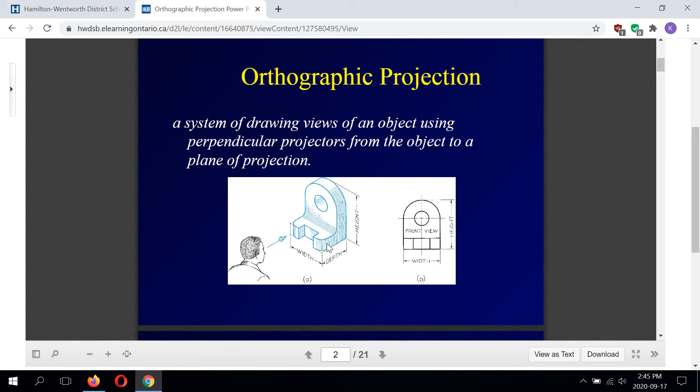certain topics here. So, orthographic projection multi-view drawing is a system of drawing views of an object using perpendicular projectors from the object to a plane of projection. Meaning that when you look at an object, in this case, it has a width, a depth, and a height. And if this person is looking at it straight on at the front in full 2D perspective, this is what you're going to see. He's only going to see this surface through the hole and 1, 2, 3 surfaces here that swing around as a radius on each side.

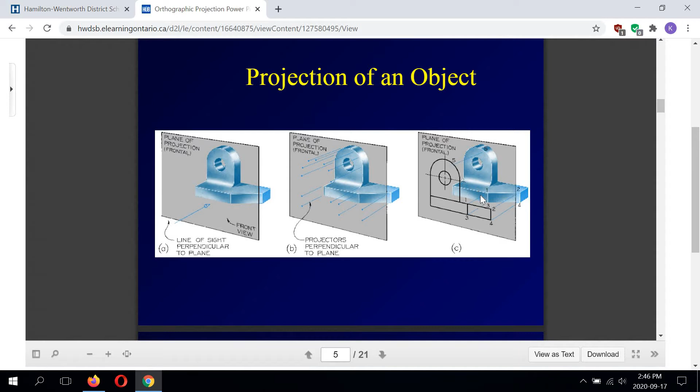We're going to skip over history and we're going to take a look at projection of an object. So all of these projectors basically protrude out to give you a two-dimensional view on any object that you're looking at, right? Whatever's in your line of sight, right? So this is how it starts. You look at the object in this direction, and then the plane of projection basically jumps out at you, and this is what you see in your sight, right? You're just going to see those normal surfaces that your eye is observing at that time.

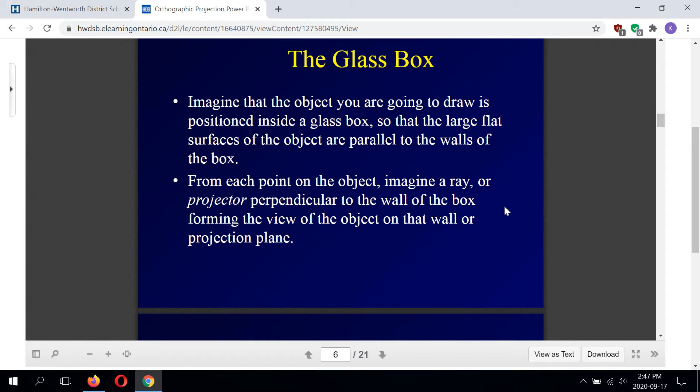So the glass box, which just by description is a little hard to understand. So it says that imagine that the object you are going to draw is positioned inside a glass box, so that the large flat surfaces of the object are parallel to the walls of the box. From each point on the object, imagine a ray or projector perpendicular to the wall of the box, forming the view of the object on that wall or projection plane. Well, to me, that description is hard to understand. But when you look at it, a picture is worth 1,000 words, much more than this.

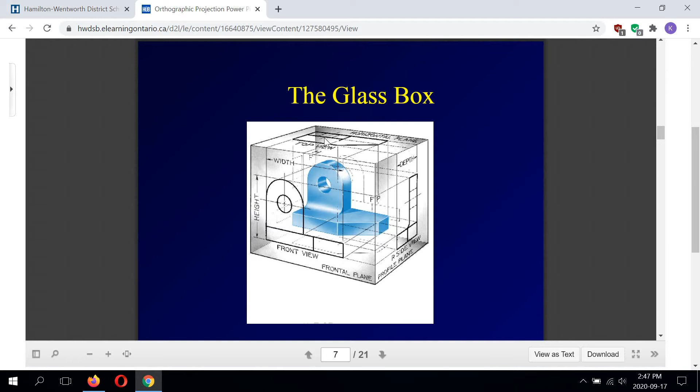So this is what the glass box looks like. So imagine the object is inside the glass box, and all of those surfaces project to the faces of the box on all 6 sides. So we can have a possible 6 views normally when we look at this like this. And typically we have 3 views that are the most important. We have a front view, a top view above, and a right side view to the right.

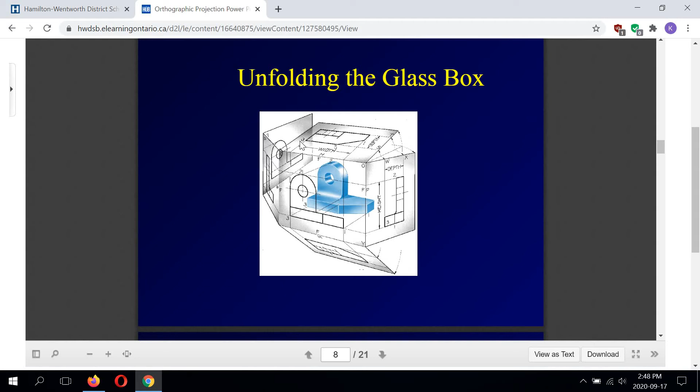So unfolding the glass box, if we unhinge it in a certain way, so unfolding the glass box for third angle projection, which is the method we use in Canada, imagine that the walls of the box are hinged and unfold the views outward around the front view. This will give you the standard arrangement of views for third angle projection, which is used in Canada and some other countries. So when you unhinge that glass box, as you see beginning to happen here, this is the order of the views you'll have.

So you'll have your front view in the middle, which is basically the parent view, which is considered the dominant view above all the other views. It usually shows the most information. You have the right side view to its right, and you have your top view above, your bottom view beneath, your left side view to the left, and your rear view to the extreme left. And this is the order for third angle projection, 6 views. And this order is always going to be in this order. This is never going to change.

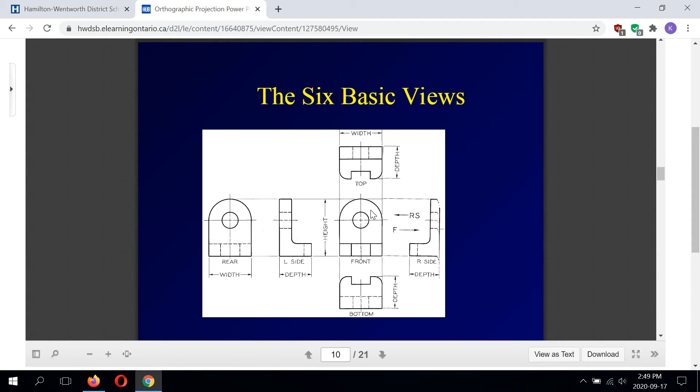And you notice that all the views have to line up with one another. So the center of this hole lines up with the center of the hole on every view, in line with it from top to bottom and horizontally through. Same with where the views begin at the bottom, where they finish at the top, where they begin on the left, and where they end on the right. This slot is no smaller or no larger than the slot that's shown in 2D perspective on the front view, and vice versa. So all the views just can't be thrown on a page somewhere. They have to be aligned. It's very important. The standard arrangement of views.

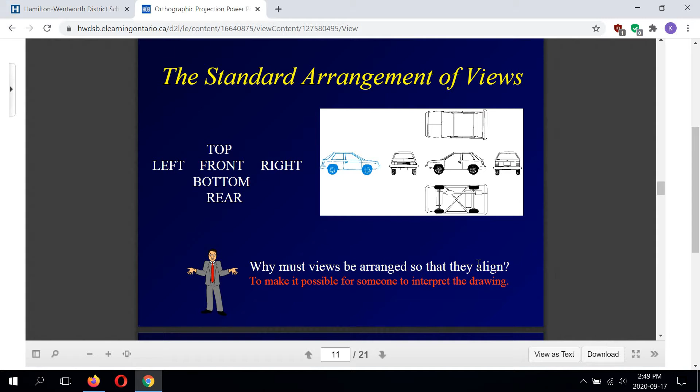So here we have another example, the same example with a car. Although this is a view of the side of the car, this view typically shows the most information. Its profile, so it is in the front. Why must views be arranged so that they align? To make it possible for someone to interpret the drawing. We're gonna skip over transferring dimensions and using a miter line.

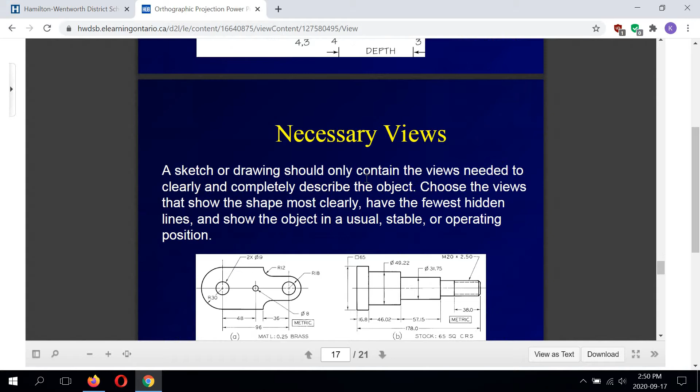And necessary views. So a sketch or drawing should only contain the views needed to clearly and completely describe the object. Choose the views that show the shape most clearly, have the fewest hidden lines, and show the object in a usual stable or operating position.

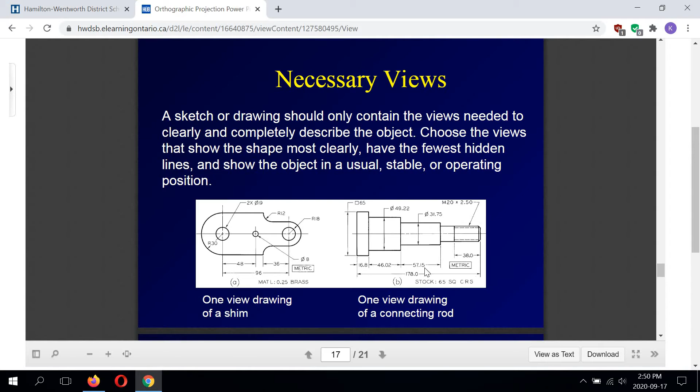Right? So a shaft like this is normally horizontal. We normally show it in its operating position. This is one view drawing of a shim. And I call this a shaft, but same thing, it's a connecting rod. Position of side views. An alternative position for the side view is rotated and aligned with the top view.

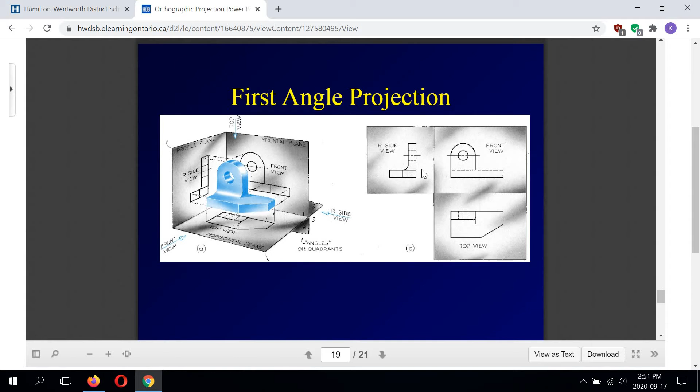First angle projection. Now this is something that we're not going to bother with. It's just arranging the three views in a different order. So basically this is something that's seen more in Europe. So comparing symbols for first and third angle projection, that is the symbol for third angle projection that you would normally see on a mechanical drafting title block in industry, and the basic three view alignment minus the 6 views.

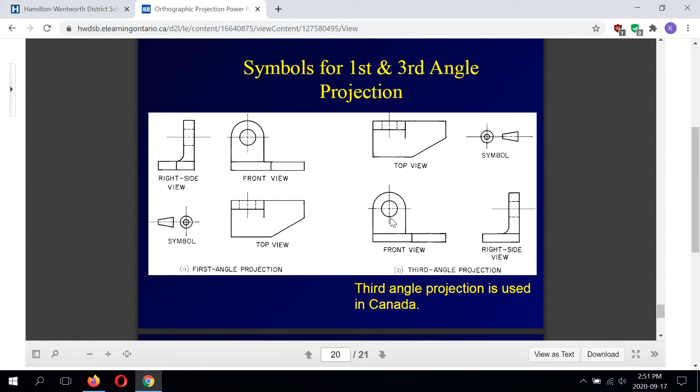This one, the symbol is slightly different and basically inverted, and the top view is at the bottom, the front view goes above, and the right side view goes to the left of the front view. So if you ask me, our symbol and our third angle projection that we use in Canada is easier to understand. I think it makes a lot more sense.

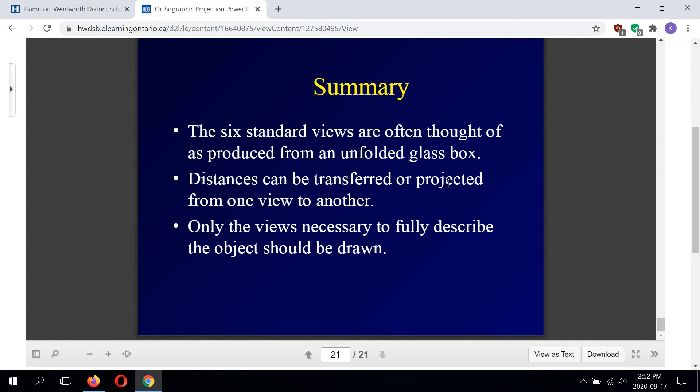So in summary, the 6 standard views are often thought of as produced from an unfolded glass box. Distances can be transferred or projected from one view to another. Only the views necessary to fully describe the object should be drawn. So that concludes the PowerPoint. We're going to go back one.

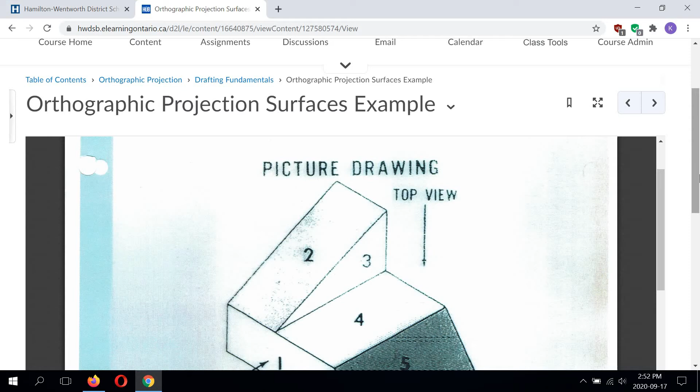And we're going to take a look at this sheet right here, orthographic projection surfaces example. And this is just another sheet for reference, a picture drawing. It shows an interesting object here that has all the surfaces numbered, right? So every surface has a number, and these arrows are pointing to the possible 2D views, the basic 3 views. So we have top, front, and right side.

So when we look at this from a 2D perspective from the front, we're only going to notice surfaces number 1 and number 2. When we look at it from the top, we're going to see surfaces 2, 4, and 5. And when we look at this from the right, we're going to see surfaces 3 and 5. Even though this is on an angle here, looking at this from the right side view, we would have no perception of that angle, only its height that would look flat to us and straight up.

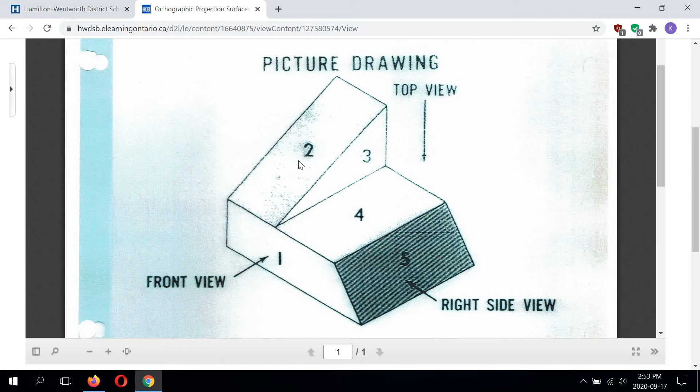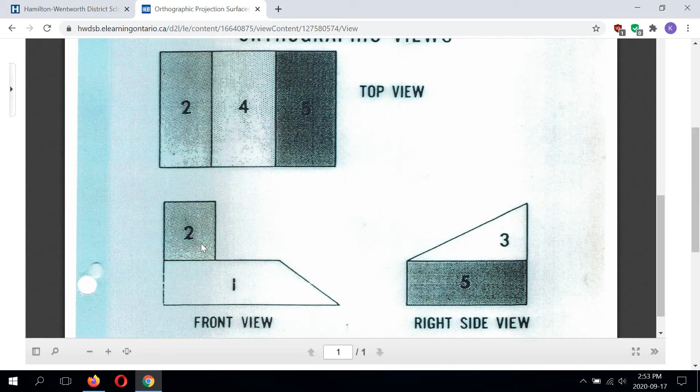Same thing with the number 2 surface. Even though it's on an angle, from the front view, it would appear to be going up straight from that perspective. And to prove it to you, so here's what we see. When we see the top view, again, 2, 4, 5, looks like a rectangle. Surfaces number 1 and 2, and surfaces 5 and 3. Obviously, we get a perspective of the angle on the right side view here.

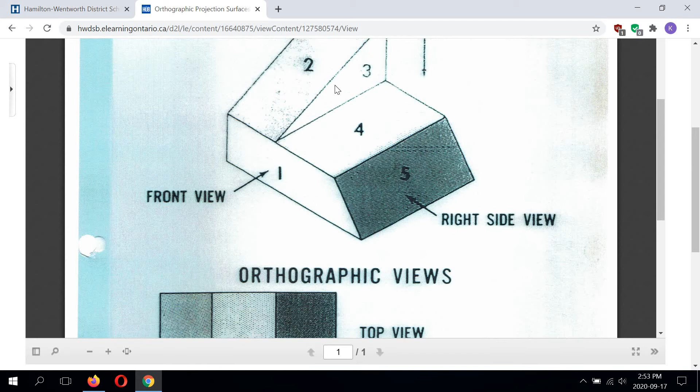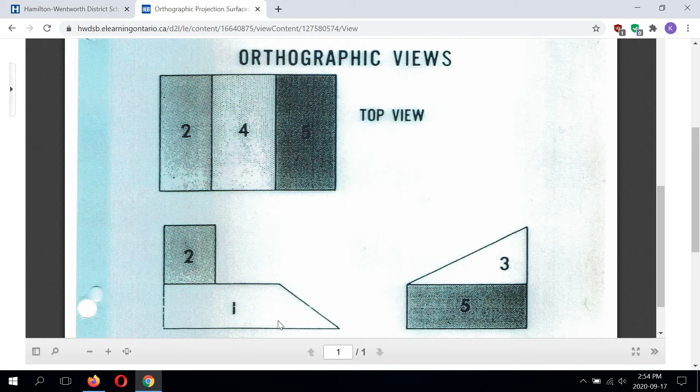So this is the basic 3 views that we're going to spend some time on. And you're going to notice that even in the YouTube videos you watched with the woman sketching all of the views, she did the same order of arrangement. She did this as a top view, a front view, and a right side view. And she did them in this exact same order, and everything was lining up. The only thing she doesn't use is a ruler, which is too bad.

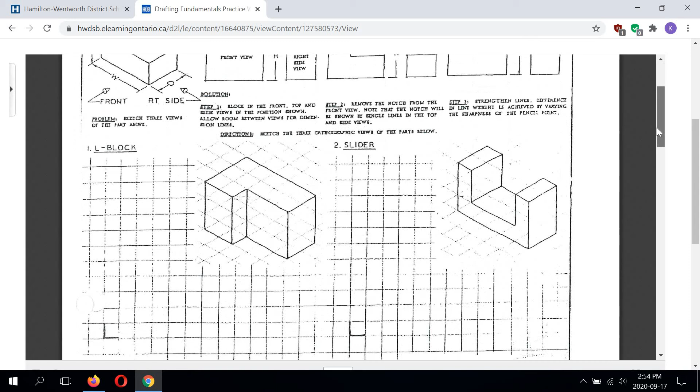Okay, so we're going to take a look at the practice worksheet. Now, what I'd like you to do is print this off. This is 2 pages. You can print this off on your printer at home, preferably. And basically, for the L-block, the slider, the tongue, and the step guide, you're going to be producing the 3 basic views. So the top view, front view, and right side view in this order. There is room for these to fit in these grid blocks if you do it correctly.

So there's an example done for you at the top of the sheet here. So it shows basically this step guide here. And it shows how you can get this started. So you can draw the most exterior perimeters in rectangular form and then slowly define all the features. And then lastly, you could erase the lines that you don't need and complete it.

So it doesn't have to be done exactly like this, but this is basically a very step-by-step process on how you can begin and get to this end result by looking at this example, right? So this is top, front, and right.

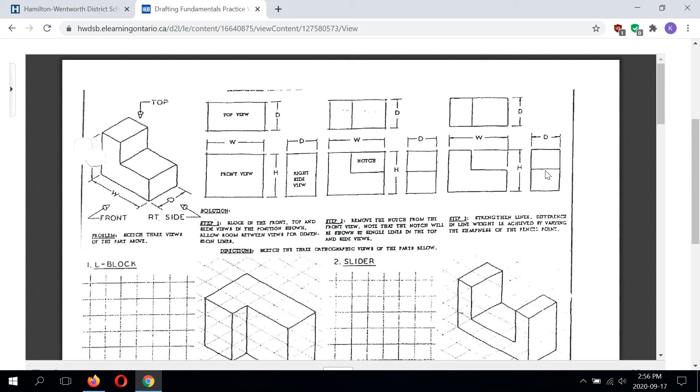So, like AutoCAD, there's an origin to start in every example. So you're going to start with the front view in this example, and this has to be done to scale. So your origin, you can imagine it right here on this 3-dimensional looking block. And looking at it in this direction is the front. Looking at it from this direction is the top, and this direction from the right, as you see my cursor

flying around the screen. So you're going to count 1, 2, 3, 4, 5 grid lengths, and you're going to go 1, 2, 3, 4, 5 on the sheet of paper. That's going to be your length. You're going to come up 1, 2, 3 for height and come back and finish that rectangle, and you're going to count 1, 2 squares to place the vertical line here.

Now, how many spaces should you leave between views? I would say leave 1 grid space. No more than 1 grid space is fine before you start working on the top view. And again, you would draw the top view. You would go 1, 2, 3 squares, come over 5, down 2, back 3, down 1, and back to finish.

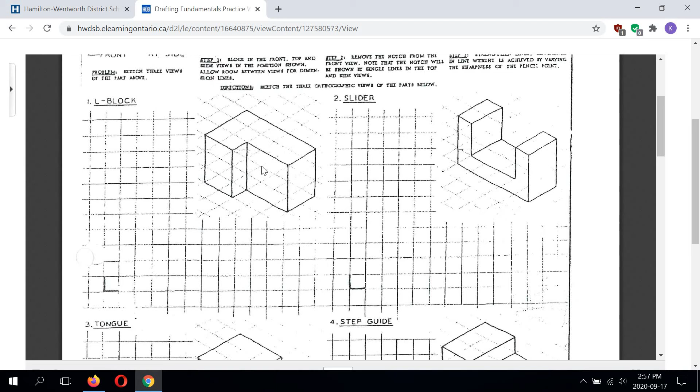For the right side view, you would leave 1 grid space so the views aren't jammed up against each other, and you would draw another rectangular block that's 3 squares high by 3 squares down and back, and then leave 1 vertical line to show this rabbet joint in here, this notch out. So you're going to do that for every single example here.

Remember, they have to be aligned like you've seen in the YouTube videos, like you've seen in the PowerPoint, and like you've seen in the previous slide, the image I just showed you for the picture drawing.

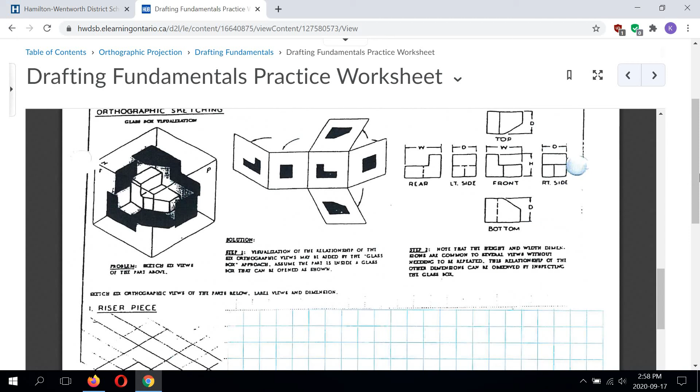Now, when you get to the last page on the back, this shows a glass box example. So this has to do with the PowerPoint, where you see the object in the glass box, and you have to basically cut and unhinge all 6 views, right? So when you unhinge this and fold it out, this is that same arrangement of views that we saw in the PowerPoint, 6 views. Again, you have your top, front, and right side view where they need to be.

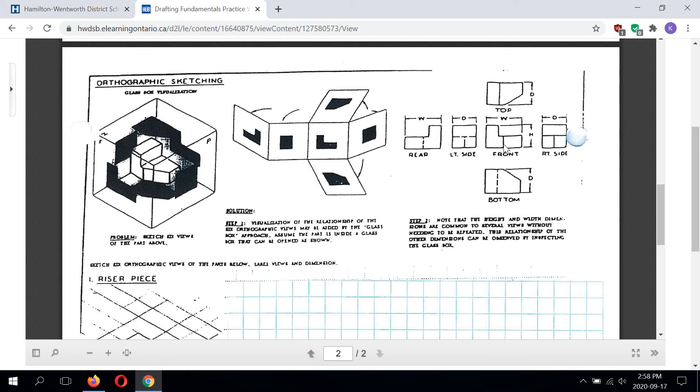You have your bottom view at the bottom, your left side view to the left, and your rear to the extreme left. And again, there's an origin here. So if you do this correctly and you leave 1 grid space between all the views, you are going to have everything fit perfectly on this grid.

So here's your starting point for the riser piece. Here's your origin. So imagine this is your front view here, looking at it in this direction, and then your origin is sitting here. So you're going to start with the front view, and you're going to draw 3 squares up, 4 squares over, down, and back, and you're going to put a little vertical line in the middle here to complete the front view.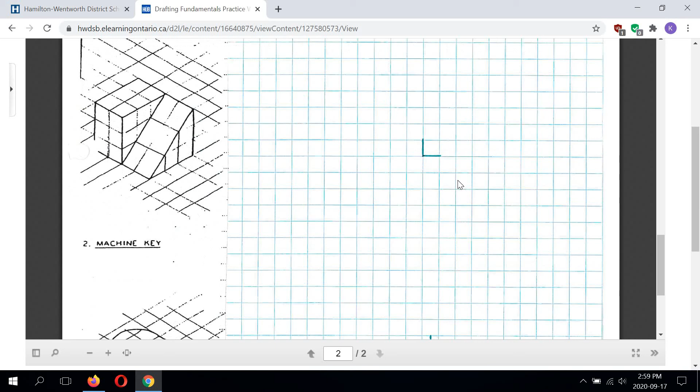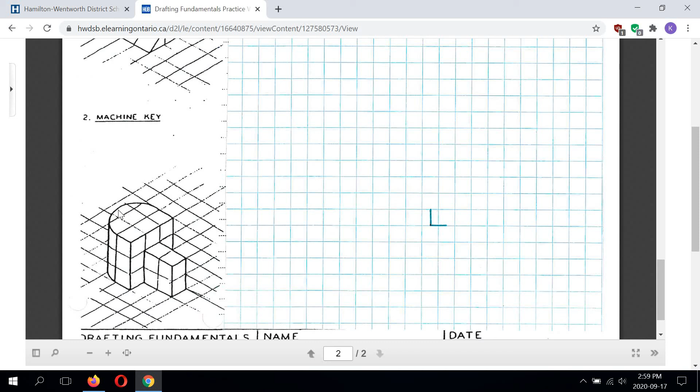Same thing with the machine key. Now notice I put the origin offset a bit. It's offset by half a grid space because when you look at this, it's 1, 2, 3, 4, 4.5 squares. So basically, because this is the front view, looking at it in this direction, your origin sitting somewhere around here, you're going to be drawing half a square plus 2 plus 2.

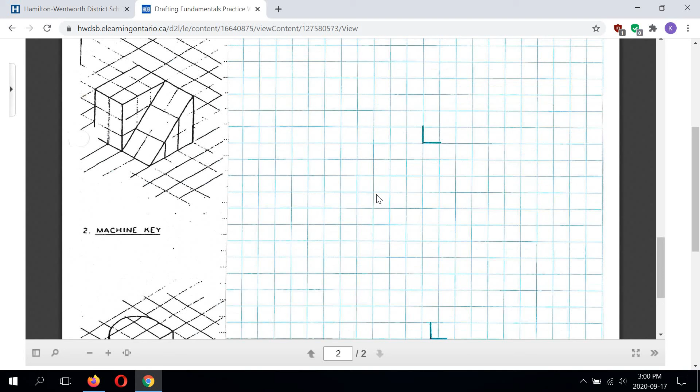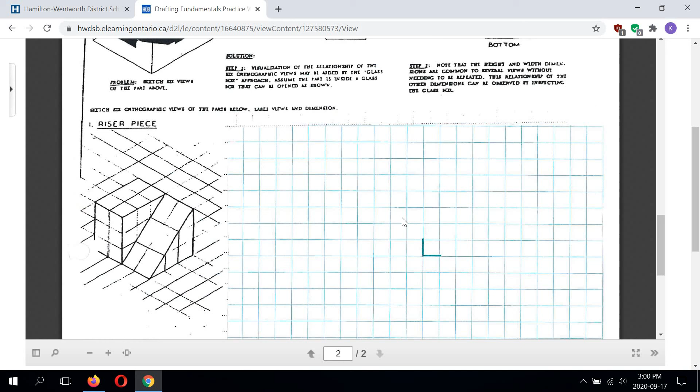So you're going to come half a square, 1, 2, 3, 4, and then you're going to come up 2, back 2, up 1, back to here, and all the way down. Right? It's kind of tricky to explain a little bit, but I think you can basically understand what I'm saying. So I want you to try this at home, and so I want you to print this off on your printer and see if you can complete it.

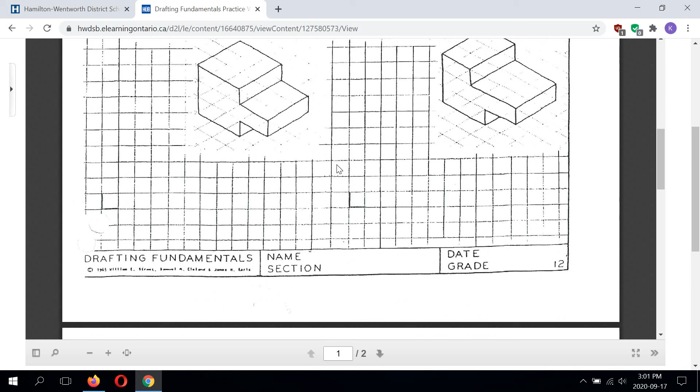And I'd like you to use a pencil to do this, preferably, and you must use a ruler to do this to keep your line work straight. So remember, keep line work straight. Use a ruler at all times. Don't freehand it. You'll have a much easier time if you use a straight edge.

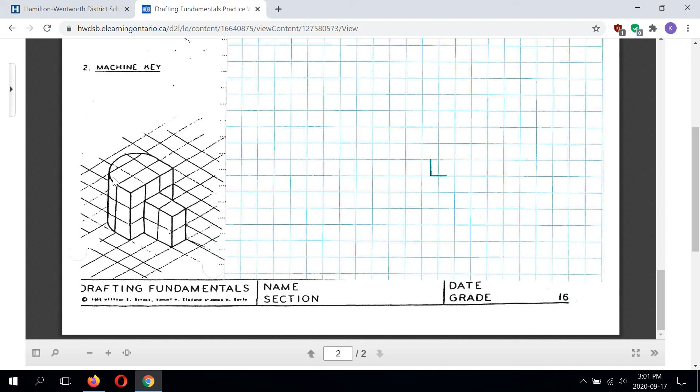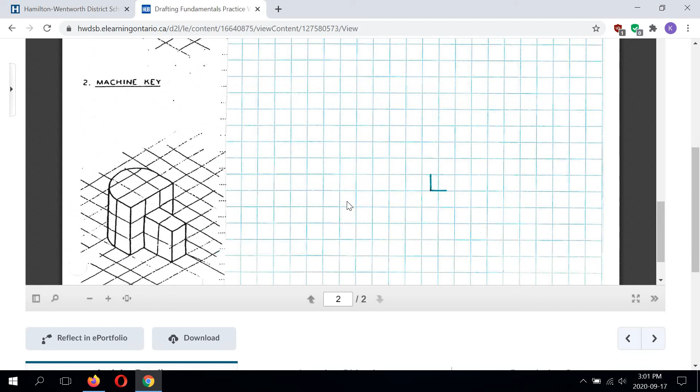And lastly, I know that this has a bit of a radius on it, which might be a bit difficult to freehand, but if you have a drafter's template or a stencil of some kind or a compass you can use from your math kit, you might be able to easily sketch that semicircle perfectly. But if not, just try to freehand it as neatly and as best as you can. Remember, this isn't a race, so don't rush through this. I'd like you to take your time and do this correctly.

And then I'd like you to submit your results to the Dropbox if you're working online. And if you are coming into class, I'd like you to bring it in to me to take a look at, please, the next time you're in class on your day.